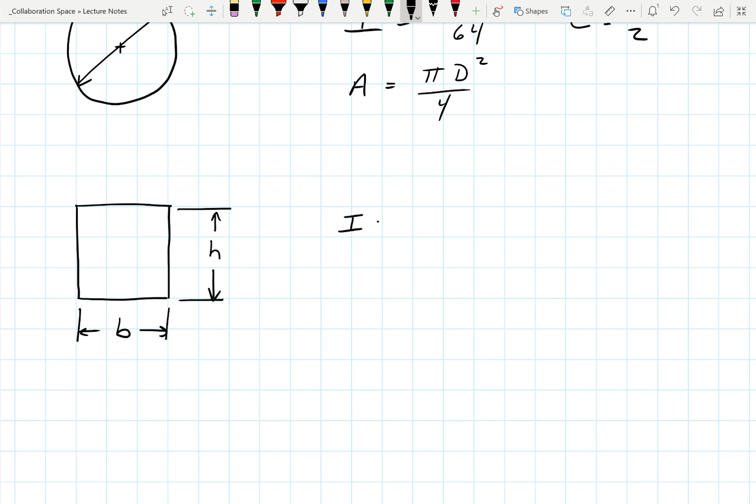What's the I for a square? Okay. The area, base times height, and the C, height over 2. Okay. Now, I'm going to do something just to make sure you guys are getting what the book's doing sometimes. So if you remember from math,

that's your x-axis, that's your y-axis, right? And you were given a line that went here, okay? What's its value? Let's say it's at 2, okay? What's the equation of that? Y is equal to? Y is equal to 0. We don't know anything in height. What's the x equal to? 2. But it's infinite up and down. It's any y. So when they tell you something with moments of inertia, that's usually labeled xx. That's that line.

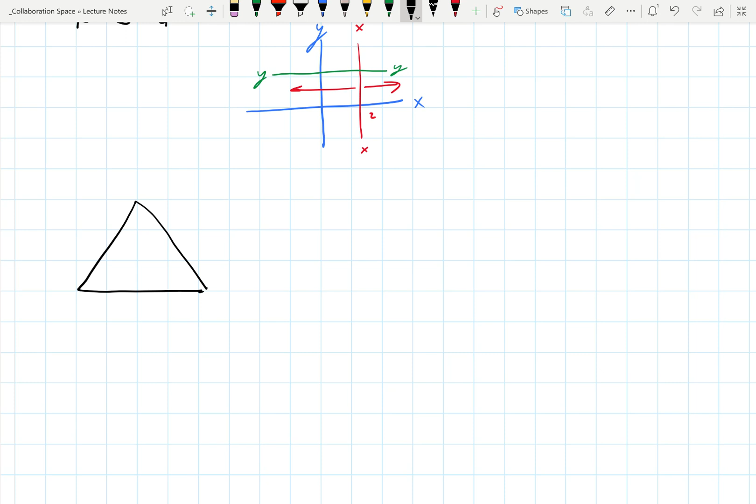How about a triangle? Most of the time we would never make any shapes out of this stuff. Not very many calls for triangular shaped beams or columns. But some architect could actually do something really crazy. So you're probably going to look that one up, because I don't even know that one off the top of my head. So I'll give you the area. Yep, 1/2 base times height. I equals the total M times R squared. I is equal to summation of M times what? Times R squared.

That one just seems weird. Frank, is there one in the back of the book for a triangle? I may have just pulled up a shape that's... It's base times height cubed over 36. I like that better. Base times height cubed over 36. Cool. All right, centroid. This one's actually one you should know, but you may not remember. Where's the centroid on a triangle? From the bottom. Towards the bottom. Okay. Anybody remember what that one is?

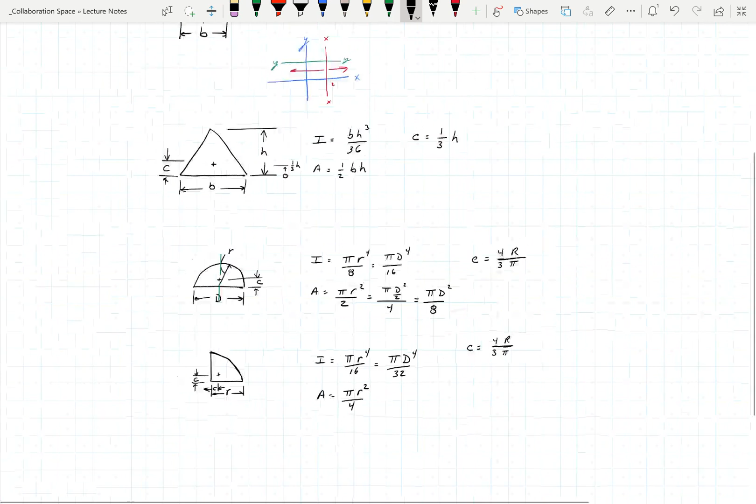Okay. Here's your cheat sheet, folks. If it's not in the back of your book, this would be the point where I'd say, write it in the back of your book. But it is in the back of the book. If you're using it electronically and you're getting ready for an exam, you want to put it on a piece of paper. Make sense? Okay. Cool. All right. So given all those different shapes and stuff, let's go play with some.

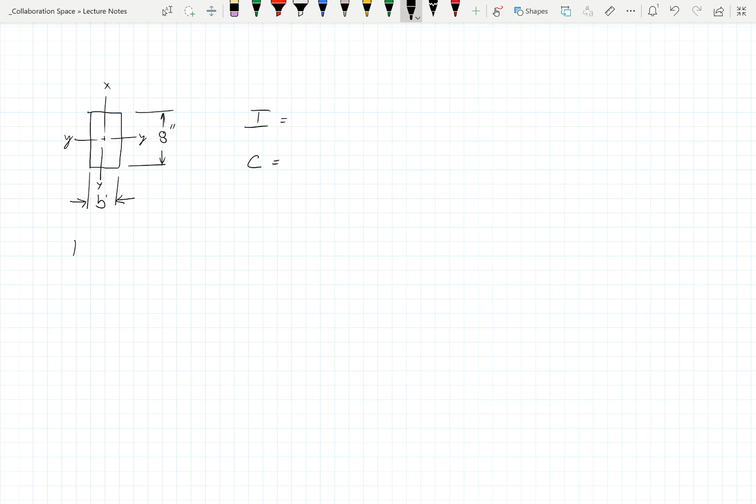All right, so XX, YY. Give me the I for this and the C. And let's make it 8 inches here, 2 inches there. Actually, to do this, let's do base, and let's make base equal to 2, 4, and 6, and we'll do all 3 of them. And we're going to look for I in the YY, and C in the YY. So going up and down. So C is going to be pretty constant. Let's do C first, right? C is going to be H divided by 2. In this case, it's going to be 2 divided by 2 equals 1.

And, I'm sorry. The hell was I thinking? It's having too much fun there. It's 8 inches. So it's got to be 4 inches. So they're the same all the way across. Okay? I for this, base times height cubed over 12. And the first one's going to be 2 times 2 cubed over 12. Going to equal what? Is that what you said? No, you got 2 2s there. For H, it's 8. Oh. Thank you. I knew that was looking too easy.

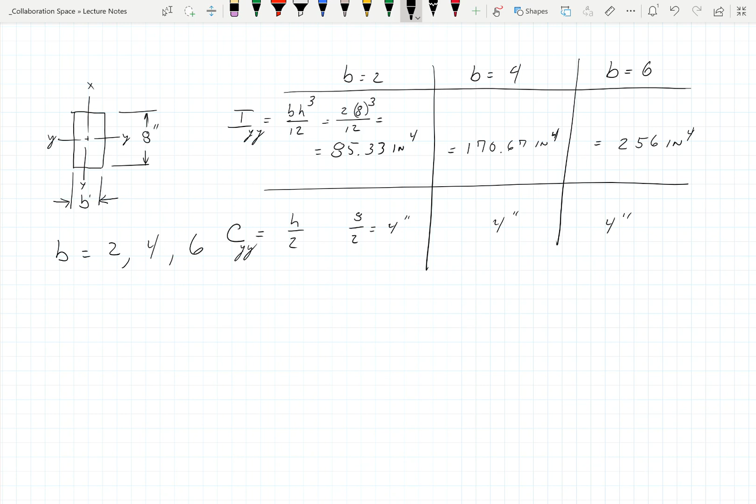Okay? It's going to be an advantage when we're trying to design things with I-beams, and we get the flanges up. Okay? I'm going to do an I-beam next, just because it's so much more fun. But I want you to remember, this is something you can look up in the back of the book. Okay? So we don't have to reinvent the wheel on standard shapes. But I want to introduce you to a few things about this and why all the areas and stuff were very important. Okay. All right. So let's get back here. This was example 1.

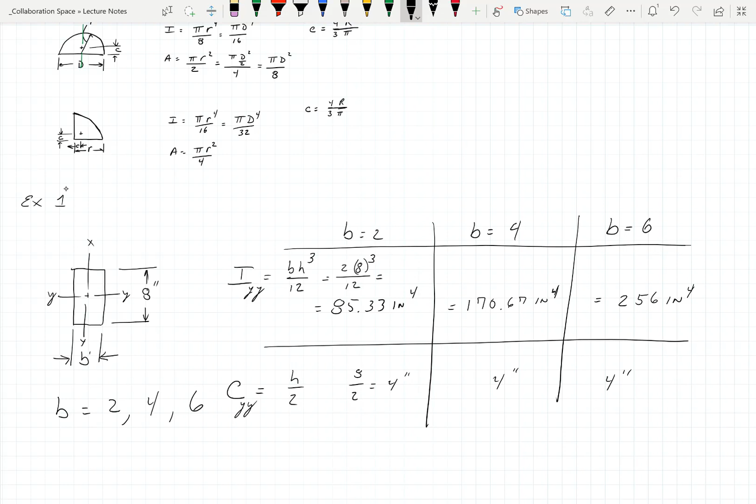All right. Example 2. Let's do this. All right. Now, actually, let's modify this a bit. Yeah, we'll do that shape. Let's do 10 inches here. Let's do 1 inch. Typical. So 1, 1, 2 is 8. Let's do 8 inches in here. And let's make this 6 inches. Nice to put your arrows in the same place. And let's make this 10 inches. All right, now I'm just being OCD.

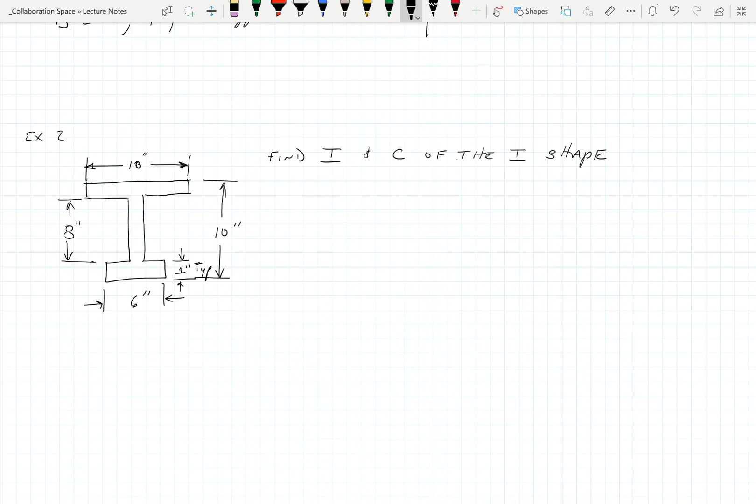Hey, did anybody in your lifetime show you how to draw arrows? Yeah? No? All right, so when you draw an arrow, you want it to end like so. You do this curve, and that curve, and then fill them in, okay? And it makes them more unique than if it's that, all right? Just FYI, okay? Do I always do it? No. But it sure helps sometimes when you're really trying to get your point across. My arrows right there, they just really bother me.

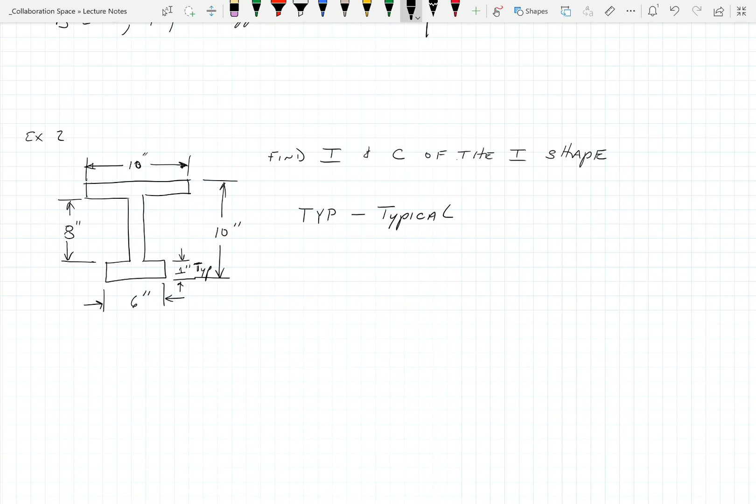What's that little segment in the corner? I can't really read the number. The TYP. TYP, I'm going to come to that one. So, here's another, and this is the reason I'm asking about arrows, but if you see TYP on a drawing, they are always capital. That means typical. And if I give you a 1 inch dimension, I don't give you anything else for all those other dimensions. Typical is for anything that's not labeled. What's the number next to typical? I can't read. 1 inch. Sorry, that would be nice to clean that up, wouldn't it? How's that?

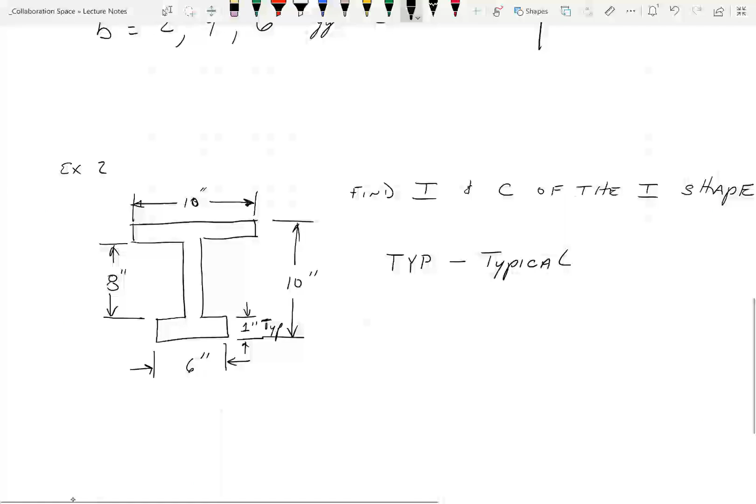Thank you. Oh, and by the way, the other thing is, geez, I really am getting OCD today. Your one should look like a line up and a little flag down the side. Just doing a 1 could be an I, could be an L, could be just chicken scratching.

Yes, I might as well. Boy, you're as bad as I am, Lord. All right, must be the lack of caffeine that's telling me not to calm down. Just fight with it. I was told one, just let it go. Just relax. But caffeine gets me riled up.

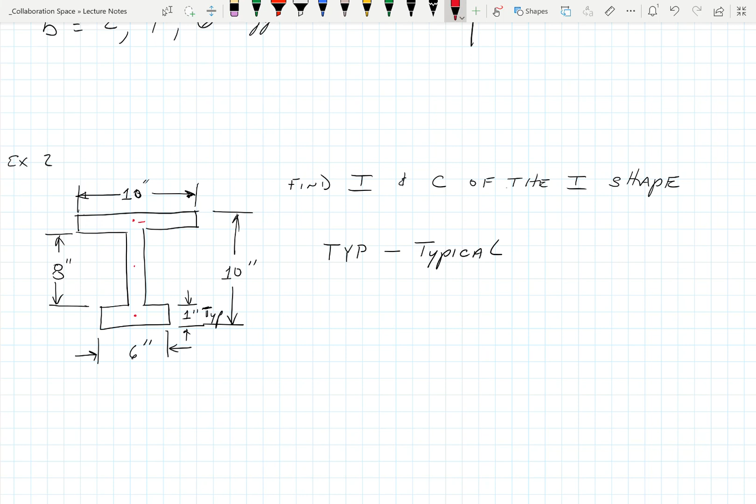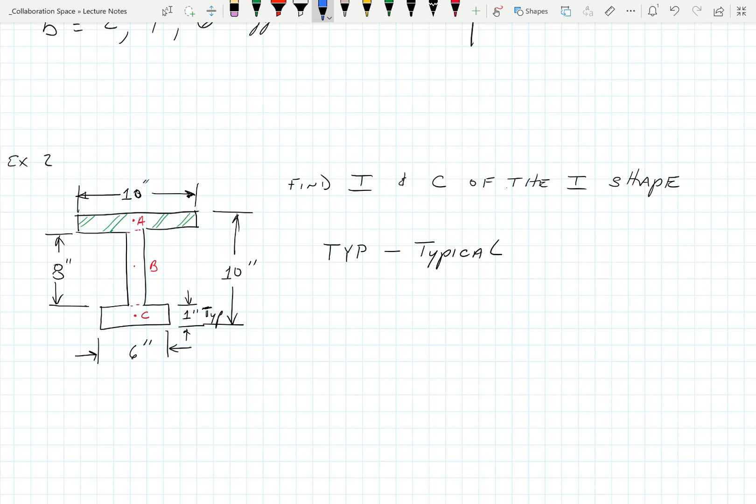Okay, now here's the interesting thing. We have something that's not standard. You can't look it up in the book, and we need to kind of take it in parts and pieces. Okay, so I'm going to do this. I'm going to label this one 1, this one 2, and this one 3. Okay, or actually, you know what would be better is not numbers, but letters. Let's label this A, B, and C. Okay, and I'm literally going to take it into shapes. All right. So if I do this, take it like so, and then I'll take it like so. Okay, and let's see what other color we haven't used. Red.

Okay, so we got 3 different shapes in there. I did it in 3 different colors so you can see it. You don't have to. Just know that we're going to break it into 3 different shapes. Okay? Cool? All right. So we have to find the C and I. Yes. And there's a table that I'm going to show you here. It's going to make your life somewhat simpler or more complicated.

All right. So we got A, we got B, and we got C. Okay? And then we're going to find

Nuts. It'd be nice if I had my notebook here with me today. I like the format I use, and I'm trying to remember what it is.

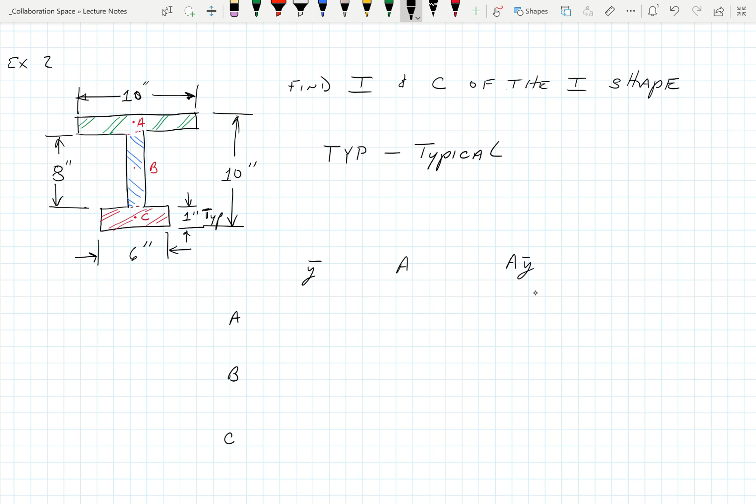Area, Y, yes. Y, and let's get you a little higher here. Y, the area, and then the AY, area, squared, cubed, yeah.

Can I look in your book real quick? I want this in some way.

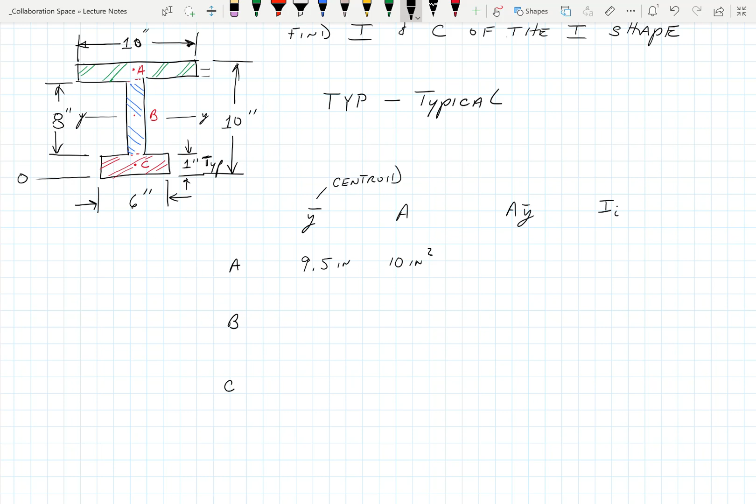Okay. The area of that shape, though, is going to be 10 by 1. Okay. And my y times A is going to be... okay. And my I for a rectangle, and if it helps you, you're more than welcome to write them out here. So we are 10 inches times 1 cubed divided by 12, or 10 twelfths, right?

All right. Coming down to B. What's B going to be? I'm hoping 5 inches. Yes? Okay. And then the area for that one will be 8 inches squared. And then A times y bar, 42. So 40. 40. Okay, I thought I heard you say 42. 8 times 5? Yeah, 40. 40.

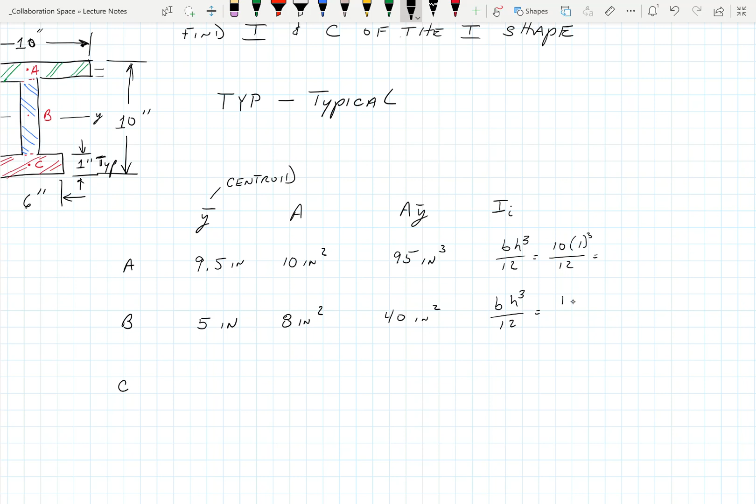Okay, and that area, mind your H is the 8 now. Oh crap, we never did put the I value in for the top one. So 1 inch times 8 cubed over 12. What was the I for A? 0.83. And this one is going to be 42.67 inches to the fourth.

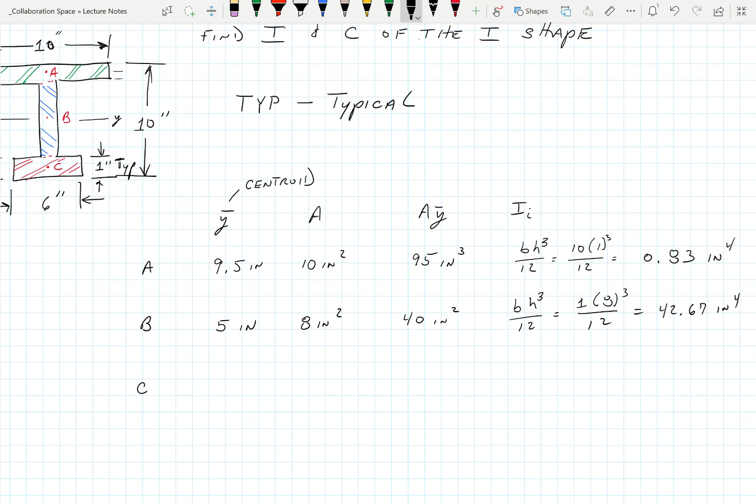Okay. C should be 0.5 inches. Okay. Our area, 6 times 1, should be 6 inches squared. 6 times 0.5 should wind up with 3 inches cubed, right? All right, and this one is going to be base times height cubed over 12. 6 times 1 cubed over 12. 0.5. Cool.

Now, you want to find the true centroid of this thing, right? Because we got to know where it's spinning from. And if I was to take this, where'd all the time go? All right, we'll pause there and finish it on one.

Fun. I looked at 11:30. Oh, I got plenty of time. Sorry.